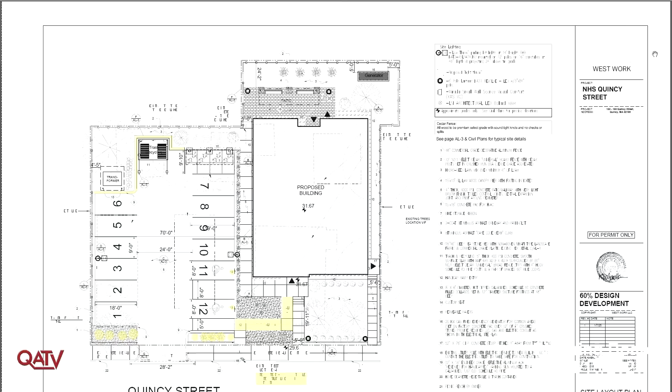I think the next sheet might be the landscaping drawing, because I did just revise it. If we could have the next sheet, please. We've updated the schedule and given you the new species that we're proposing off of Quincy Street for the screening for the parking. I believe next it will be Jim's drawings.

Great, does anybody have any questions? Right now, great, no. Thank you. Thank you.

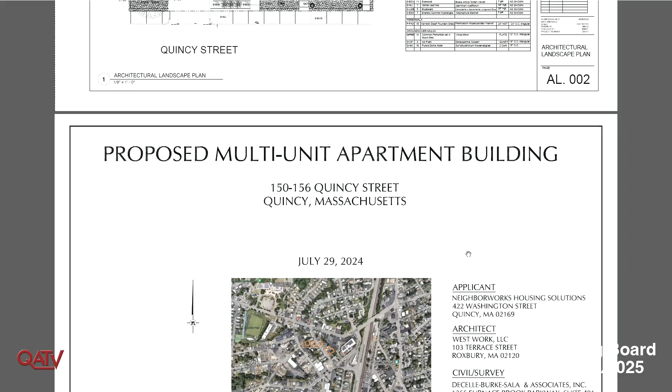We made some revisions that correlate with what Mike was talking about earlier: revised the dumpster location and the walkway. Given the concern regarding the tolerance with handicap accessibility, we were right up against it in the original design, so moving that ramp out, as Mike explained, puts it right in the construction tolerances, so it should be easy to hit.

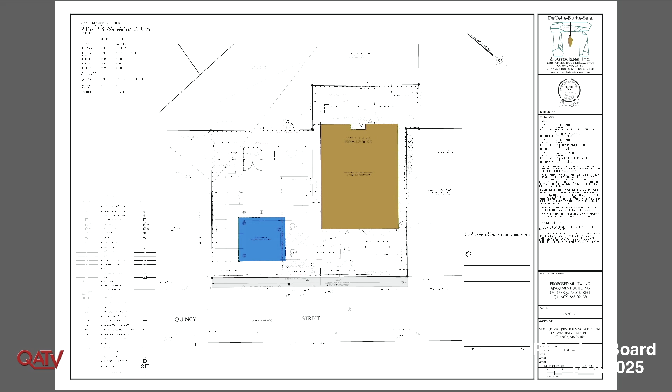That added to, then I added some other spot grades for the reconstruction of the sidewalk itself, and further defined the parking lot, just made it a little bit more clear for the construction. We added snow storage, signage, and a signature block. And I'd say that's about it. Thanks a lot.

There was a continuous effort over the last couple of months to address any outstanding comments. We think this is a great proposal. NeighborWorks has a funding request with the state for funding and financing of the proposal that's due to be voted on next month. So the hope was that we could move this matter forward tonight as best we could. We tried to address all the outstanding comments as best we could.

I know in speaking with Mr. Stevens, there's a few odd end items he's continuing to wait on. One of them is a traffic comment letter, but we really don't anticipate any traffic from this proposal. The conversation we had last time was that many of these folks are transitioning from homelessness into housing for the first time, and as a result, they don't have vehicles. Really, the only vehicles coming to and from the site will be staff working within the facility and providing services to these tenants. So we don't anticipate any real major concerns related to traffic, but I'll leave that to Mr. Stevens.

Great, any questions? Okay, so this is a continued public hearing, so we do want to open it up in case anybody would like to provide a comment. You can come speak at the podium, or there are sign-in sheets. This is again on 150, 152, and 156 Quincy Street. So if anybody would like to be heard on this.

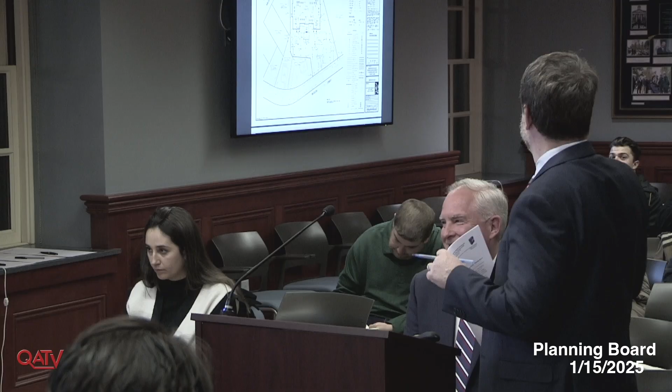Excuse me, Counsel, was it determined what ward it's in? Yeah, I think we decided it was Ward 1. It's actually Ward 1, across the street as Councilor Mitton's.

There was a question one of the neighbors raised about traffic-related concerns. I believe she lived right within the neighborhood, on the street in the rear. She raised some questions, and we talked about the fact that this was under peer review, that not only did the peer review the traffic, but also the city's traffic department did as well. I just want to assure her, as we did that night, that this underwent a significant amount of review, and that the traffic professionals would make sure that any necessary steps were taken to ensure she wasn't going to have any traffic-related concerns in her neighborhood.

I'm not sure if she might be here tonight. So does that conclude your presentation? It does. I don't know that it's necessary for Mr. Burke to present, but if there's any questions about engineering, he's certainly here. Okay, great. Does anybody have any specific questions?

Just one thing, I want to comment, I think it's going to be a nice project. I was up there the other day looking at the decrepit nursing home, and I really like the design of the building, but I would ask you, Mr. Galvin, like I ask all the developers in the city, please consider the men and women in the city of Quincy. They would love to work on a project like this.

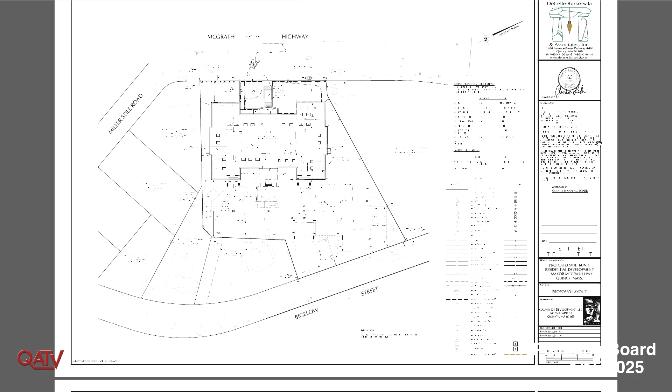So your dumpster will butt up against our property where our dumpster is? Or is there another spot, just for rodent control? We do our own with Ladybug as it is now. So where — we're 8 and 14, so I think this is us. Yeah, right here. So their dumpster's here and our dumpster is about the same area, or actually our dumpster's here, the way that's built. I think it's right here, so close to each other.

And what would your schedule be for pickup, is it once a week? You can just direct the questions through the board. Okay, and then we'll get answers to them. Is it once a week pickup or twice a week? Twice a week. Just didn't know if there was another spot it could go in, just so the two wouldn't be back to back.

And I don't know if you discussed it last time, when do you plan to start to knock it down? So just address your questions and then we'll get answers. So when is it scheduled to be knocked down, and what will be put in — I think we discussed it last time with Mr. Galvin when we went to conservation about the rodent control when it's being knocked down, and also dust control. That's it. Okay, great, thanks. So I don't know if you want to address any of those.

Actually, I think that the fact that dumpsters are back-to-back is actually a good thing in terms of location. If there are to be any rodent issues, at least it's in an area where we can treat it. Just in general, being near the river, it's going to be an issue.

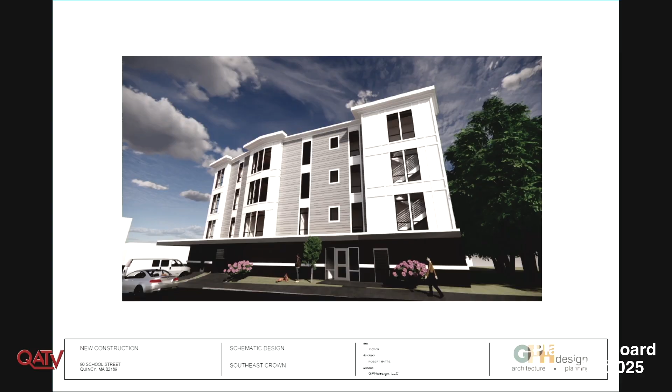So this is what we're proposing to put on this property. It's an 18-unit building, 4 stories. Almost the entire first floor is parking, with the exception of the stairwells and the front lobby. He's proposing this 18-unit building with 21 parking spaces.

One of the unique things about this building is it has a mix of residential units. It has studios, 1 bedroom with an office, and 2 bedrooms. So it has a nice mix of units, so people who can't afford a 2-bedroom unit or who don't need a 2-bedroom unit have an option of being able to rent a smaller, more affordable apartment right in the city of Quincy. This building is directly across the street from the Quincy Center zoning district. So we hope that very soon, right across the street from us, will be a lot of new development and this will fit in beautifully with what's planned across the street.

As I said, it's 4 stories, 42 feet tall. It's significantly larger than what's there now, but it's not a huge residential building compared to other buildings that are being built in the city today. The existing building essentially goes right to the lot line on 3 sides. This new building maintains essentially that same footprint, roughly the same front yard setback, and then it's right against the property lines on all 3 sides.

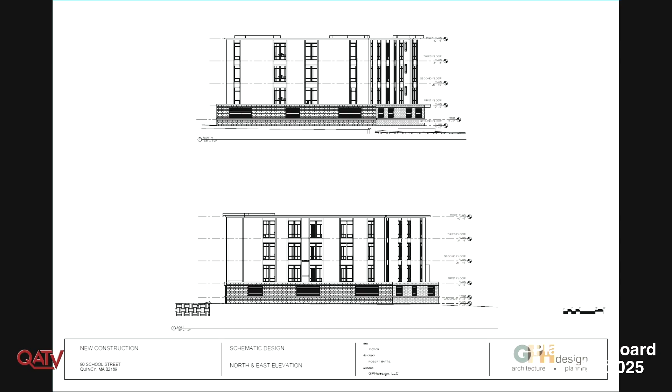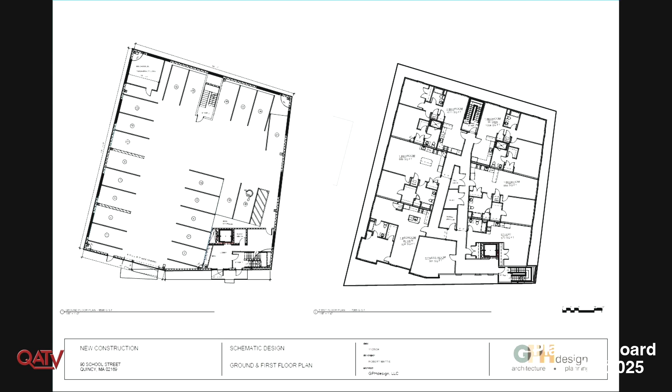There are properties on the property line on 3 sides, so that door you see on the left-hand bottom side would be a second means of egress. To achieve that, the egress door needs to be visible from that stairwell, which is why it's positioned as such. The handicap parking spot is located in proximity to the entrance of the building lobby. We also have some bike storage at the ground floor, and right now we're planning on having the trash in that back left-hand corner.

That being said, I'm welcome to any questions from the board.

Why don't you go—oh, if you have any questions, Jim, present first? Yeah, and then let's do that. We can ask questions at the end. I think that usually works best. Thank you. Thank you.

Am I pushing these along? Okay, yep, this one seems to work better.

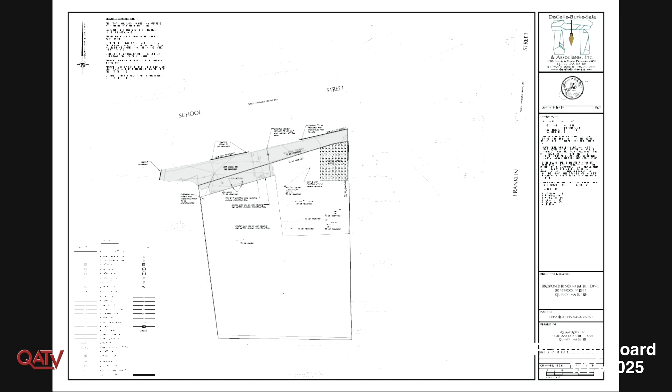This here is the construction management plan showing the limit of work along School Street and how we're going to protect that from erosion and sediment during construction. The layout you're looking at here is a 21 space parking layout, representative of the first floor of the structure. It's pretty much at street level.

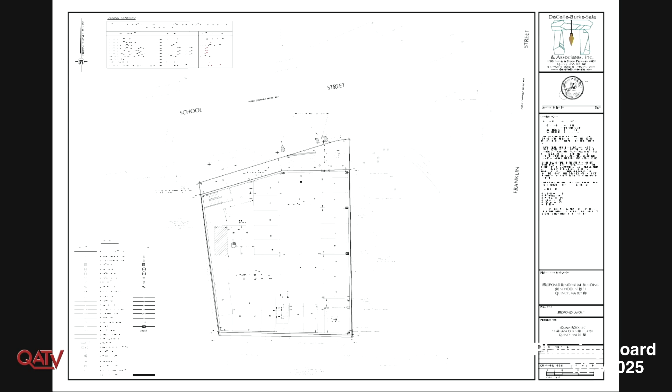You'll see that driveway that comes in off of School Street sheds towards School Street, but there is a trench drain that's going to capture that runoff and bring it back into the building, believe it or not. We're going to bring it into a 21 chamber underground Cultec system underneath the garage floor. We haven't done any soil testing yet, but I did see the soil go in, and it is good granular stuff. This is substantially larger than what's out there now, with the same watershed contributing to it, so I don't anticipate any sort of problem with that stormwater management system.

As said earlier, the utilities are new, so we're going to continue using those. I think that's all I have for you guys. If you have any questions, I'd be glad to answer them.

Okay, one issue I skipped over is that right next to the driveway in this area, we've got a designated parking spot big enough for the Amazon truck and for ride shares to pull in, to pick up people who live at the building, and for delivery trucks to make deliveries so they don't have to stop on School Street and block traffic. They have a place where they can pull off the road and get out of the way.

One other thing I forgot to mention - we're in preliminary stages, but to limit the impact on the 3 other sites, we had talked about possibly reusing the existing foundation and shoring it up if possible. That would help with cost, and would also help with having to cross property lines to get this building built.

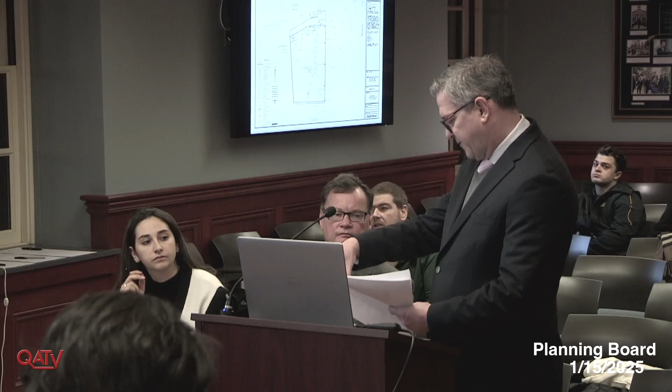Okay, I'm looking at this 8-foot wide entrance here for the driveway. If there's enough room for a car to get up to that door, I'm just thinking that we might have a car sitting on a public sidewalk waiting for the door to open or close. I could be reading it wrong. This shouldn't be - there should be enough space, the building's far enough back that a car can pull off the street. Okay, all right, because I couldn't determine that without the sketch. The garage door is definitely more than 8 feet wide, it's 16 feet wide, I believe.

Okay, all righty. And so long as - because I did see, on the inside, there's not parking spaces, but the very first spot's right up against the front. It's just kind of empty space next to the parking spaces. I didn't know if that was gonna be a problem, if we could set the front of the building back just that extra couple feet, and leave the facade overhead for floors 1, 2, and 3. Typically, you want to have some turning radius as you're pulling out of that parking spot, and that's why you wouldn't have the parking space right up against the building. I'm just thinking of the proximity of the front of that building to the street. And you could still maintain floors 1, 2, and 3 at the same facade, and just cantilever a bit if that ground level floor were pushed back a bit.

Just some thoughts, and I'll look forward to further discussion. Thank you, Madam Chair. Thank you.

Maureen: Okay, I do have a few questions. Just so I get clarification, I think you said something was 16 feet, but what's the setback of the building where the driveway is? Are you saying that's 16 feet, or were you saying the width? No, I was saying the width—it's actually 18 feet. The width of the garage door is 18 feet.

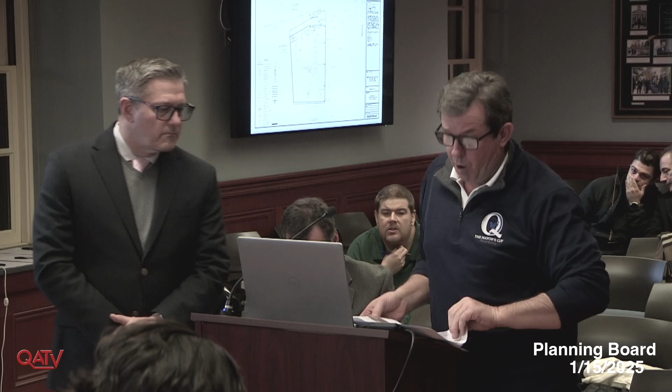Okay, and what's the setback of the building in that area where the driveway is? Jim, do you have that? Because I think that gets to Member Foley's question. Well, let's say to the property line. Yeah. The corner, the closest it's there, it's 7.6. As the curb runs, you're probably looking more like 9 feet. But like I said, you've got a full car length to the curb line. Including on the street roadway? Correct, yes.

And then in terms of that visitor parking space, somebody's going to have to back out of that space on School Street? You mean the delivery space? Yes, exactly. And I understand, I'm in that intersection all the time, and it stacks, no question. The delivery driver that's lucky enough to get that spot is just going to have to wait for the goodness of others—I'm one of them, I'll let them in. Yeah, it's right close to the intersection, but we thought it was better to have it than not. So I would say, just from my perspective, it's a concern in terms of having to back out.

Let me see—so any on-site residential amenity, since you're going from a commercial use to a residential use, for residents? Like dog parks, we see a lot. We have a small area for a dog to walk. We don't necessarily have a dog park, but we do recognize that Quincy has a dog park pretty close up the street. We do have a workout area within the building as an amenity. Bicycle storage? Bicycle storage in the basement and the parking area.

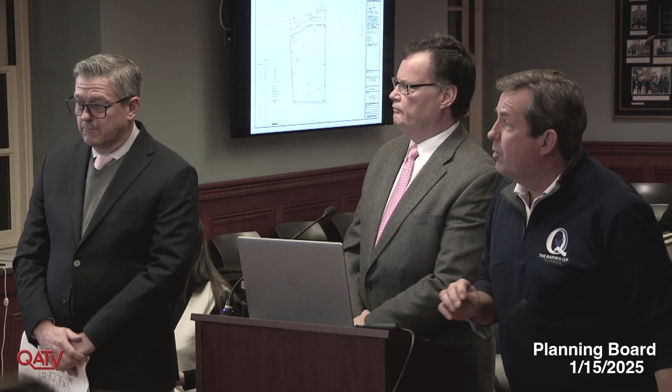We would have to see what the dimensions are. I think the 24 feet's there, if I'm not mistaken. I wouldn't have put the space there if you didn't have the 24 feet. But, like I say, if you don't stripe it, someone's going to park there.

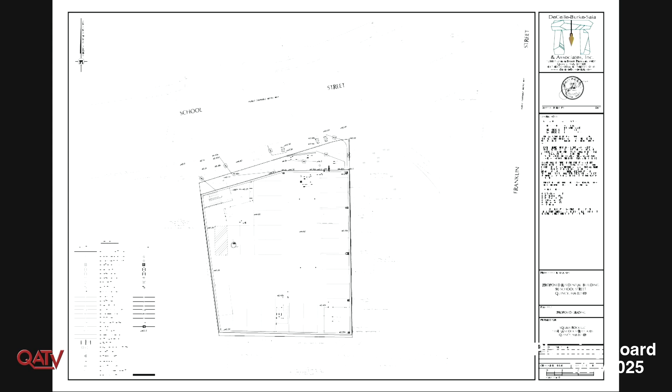So are you talking about backing out of the handicap spot, or getting into that spot? I would say both. I think both present kind of practical concerns—pull in and back in, instead of just pulling in. Because you have that's 8 feet, plus the additional 2 or 3 feet to the wall. There's a lot of room for maneuver there.

But we can certainly provide the turn, it's not a problem. I'm just not imagining it, but it just seems a little bit tight. So that was a concern. Oh, construction right up against the lot line.

You touched on this because you said I think it was presented as a raze and rebuild, but then tonight we hear you want to keep it. We've discussed reusing at least part of the existing foundation and shoring it up from the inside, so that we don't have to dig out and put in a whole new foundation.

Okay, in terms of construction, I would say even height-wise—maybe this is accomplished by the stepping back—I think you're going to need construction easements on virtually every side of this building to get onto other property to construct and build out. You can't just go on somebody else's property to construct. It's only an issue with building the first floor.

So that's why we would shore up the foundation from the inside. Yeah, you're correct that you're going to impact your adjacent properties somewhat. So if you're not able to reuse your existing foundation—which we heard for the first time tonight—are you still able to build this building? Yes, there are foundation systems we could utilize to make this happen. Assuming you can't get permission to go on the neighboring property, you can still construct? Correct. They're potentially more expensive though, because your footings aren't even on either side.

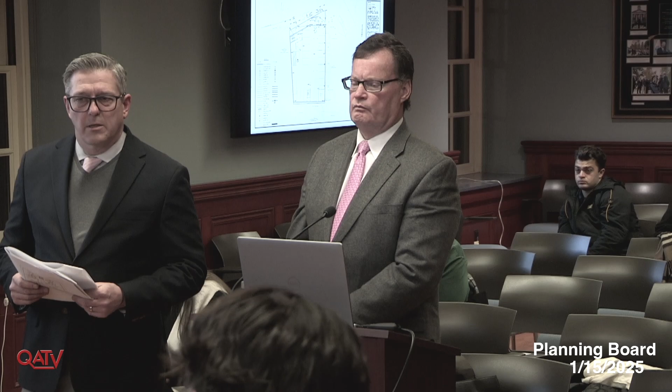I guess is this regarding HVAC systems? No, just generally—maybe 'cause again, venting. The building is only on the property line on the first level. So what is the setback on the second level? Five feet. Okay, around, all three sides, correct.

Any other questions at the moment? I mean, just to touch on—so I'm assuming you're going to have 18 units, you're going to have 18 condensers up on the roof, correct? Correct. And they'll be 3 feet tall? Not necessarily, they might be smaller than that. These are small units, I can't imagine the condensers are going to be that large.

I'm gonna say they're gonna be 3 feet tall. That's my opinion. 3 feet I actually will take, because we can keep those out of the sight line from the street. I'm confident of that.

Especially where it's only 18, especially when it's so close to the front property line, as opposed to looking at it otherwise. We can definitely keep those setbacks, and we can do sightline studies as well if that's helpful.

Is there any other questions at the moment? Mr. Chair? No. Okay, all right, so I think I'll open it to public comment. It is a public hearing.